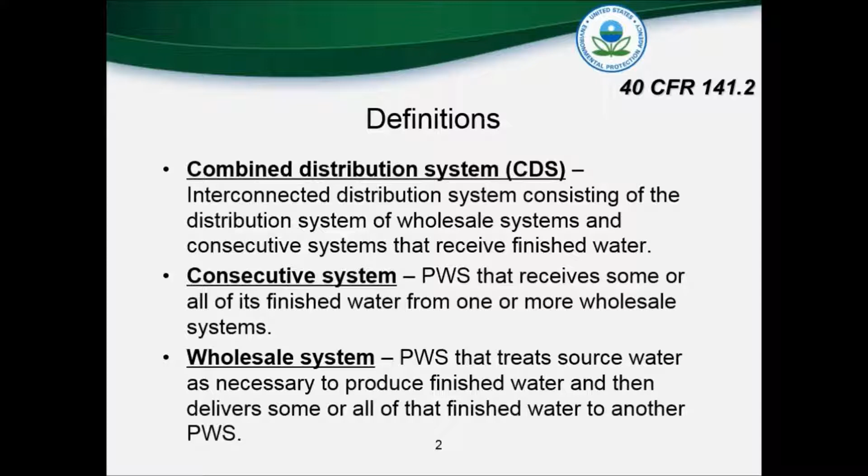Start off with some quick definitions so that everybody either remembers or we're on the same page. Some important ones for this presentation, Stage 2 in particular: the combined distribution system, which are interconnected distribution systems consisting of a wholesale system and consecutive systems that receive the finished water from their wholesale system. A consecutive system is a public water system receiving some or all of its finished water from one or more wholesale systems. A wholesale system, to complete the combined distribution system, is a public water system that treats source water as necessary to produce finished water. Finished water is important in this definition and the previous ones — producing finished water, then delivering some or all of that finished water to another public water system.

Another important part of Stage 2 is the dual sample set, which is two samples collected at the same time and location, with one of those samples analyzed for total trihalomethanes and the other analyzed for haloacetic acids, the 5-HAAs.

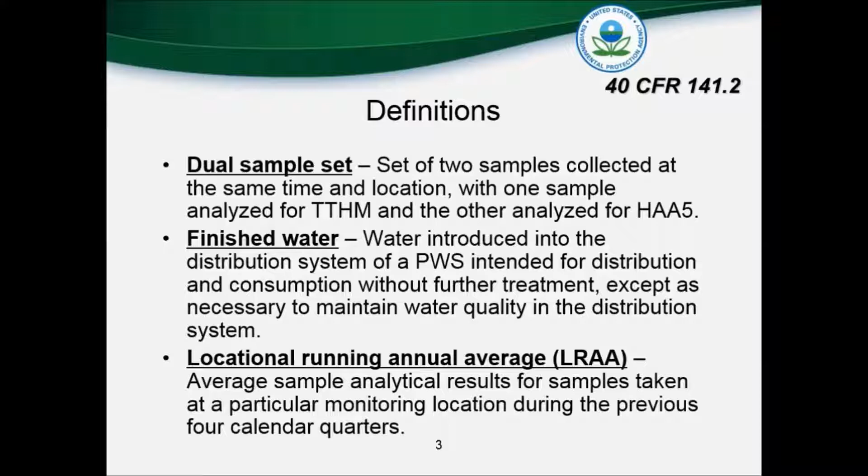Finished water, again an important part of implementing this regulation and others, is defined as water introduced into the distribution system of a public water system intended for distribution and consumption without further treatment, except as necessary to maintain water quality in the distribution system. And on the compliance side, another important part is the locational running annual average, or LRAA, which is the average of the analytical results for samples taken at a particular monitoring location during the previous 4 calendar quarters.

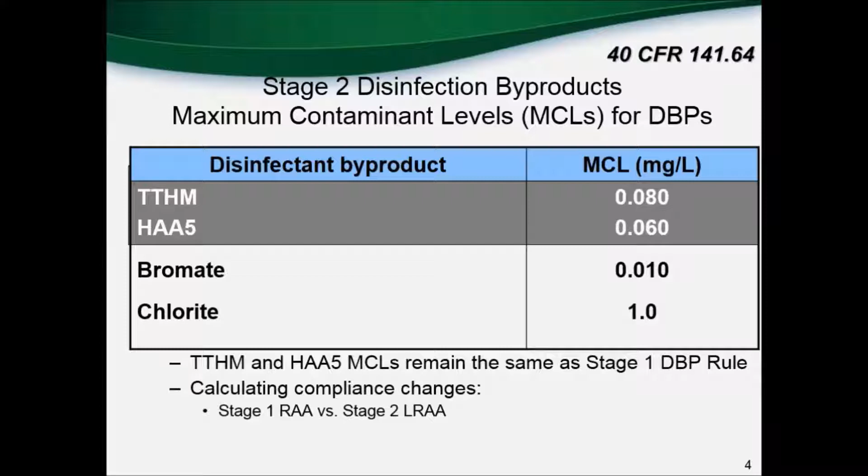Okay, a quick review of the maximum contaminant levels for the Stage 2 disinfection byproducts. They are the same as everyone's been used to dealing with under the Stage 1 rule. However, the compliance calculation has changed, as we just talked about, from a running annual average system-wide to a locational running annual average. The TTHM MCL stays the same at 80, and HAA5 at 60. The bromate and chlorite MCLs are also the same.

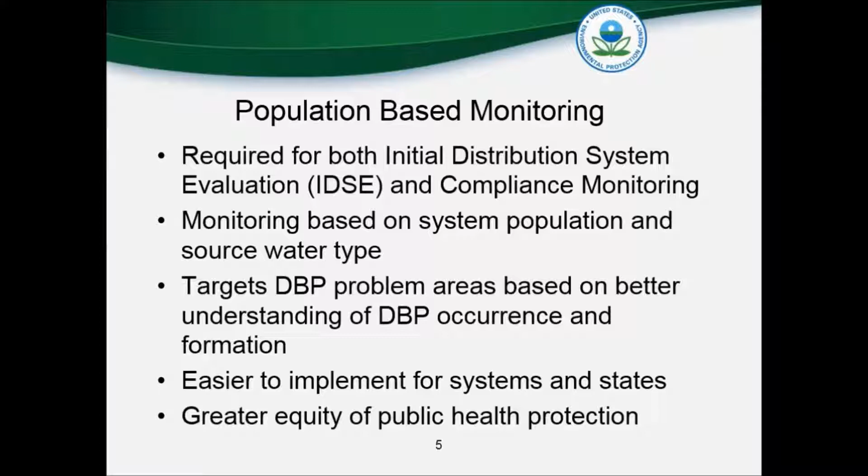An important difference between the Stage 2 rule and Stage 1 is population-based monitoring. This was an important part of developing what you see in the sampling schedules. It's required for both the initial distribution system evaluation, which we'll talk about, and ongoing compliance monitoring. Population-based monitoring is based on system population and source water type, with the goal of targeting DBP problem areas based on a better understanding of where they occur and how they form within a distribution system. It was developed to ease implementation for both systems and states and to provide greater equity of public health protection by identifying where DBPs occur, how they're formed, and the population exposed.

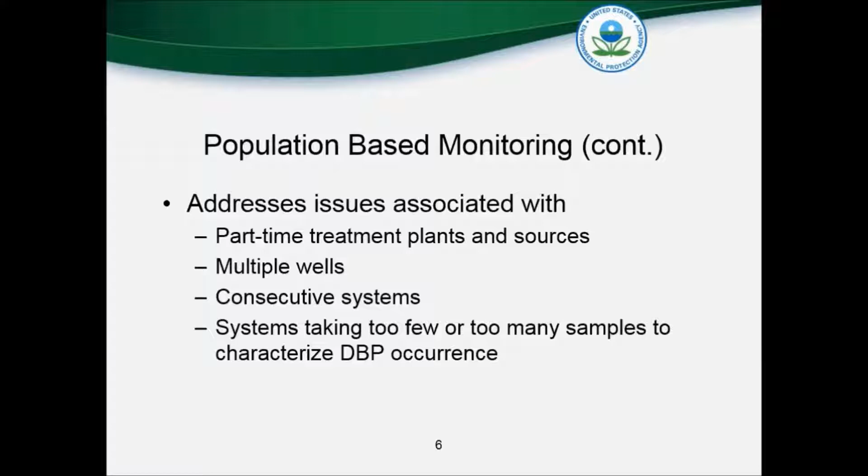This monitoring concept addresses issues associated with part-time treatment plants and sources, systems with multiple wells, the consecutive system issue which we'll talk more about, and under the previous regulatory structure, some systems were taking too few samples, or too many samples, to accurately characterize DBP occurrence.

Quickly review the IDSE requirement. Although that part of the rule has since passed, there is still some connection which we'll talk about in terms of newer systems and changes in systems. The purpose was to determine the locations of high TTHM and HAA5 concentrations in the distribution system, and those results were used in conjunction with Stage 2 disinfection byproduct compliance monitoring to identify and select the Stage 2 compliance monitoring locations.

Another important concept for this rule and for others is what is a combined distribution system. The intent of a combined distribution system is to treat a number of connected systems as one system for monitoring purposes.

The state may determine that a combined distribution does or does not include certain consecutive or wholesale systems based on a number of factors, including whether the connections are emergency connections, meaning the system receives water from a wholesaler or delivers water to a consecutive system only on an emergency basis. Another exception would be a small percentage and volume of the total water supply received from or delivered to another system.

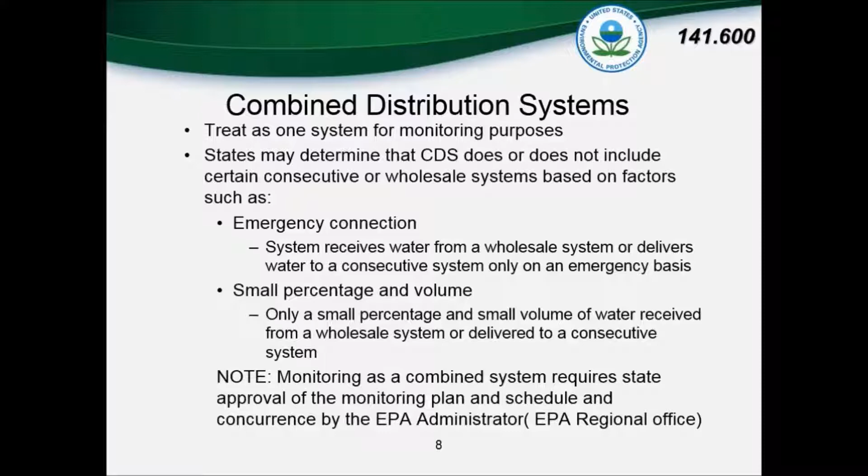As I mentioned, the IDSE, or Initial Distribution System Evaluation component of the rule has passed, or expired. Those requirements finished a while ago, and all systems would have done their IDSE or the equivalent. So the question comes up: what about new public water systems? What about systems consolidating into a combined distribution system, or adding new consecutive or wholesale connections, or new service areas, either after their initial IDSE, or new systems which had not completed an IDSE?

For new systems, all systems are required to have a monitoring plan. That monitoring plan includes the dates and locations needed to meet the Stage 2 requirements, and the sample site selection for that plan should be consistent with an IDSE.

States can require modifications to sampling plans for new or existing systems. The state could require an IDSE-like evaluation or review for new systems as a process in selecting Stage 2 monitoring sites.

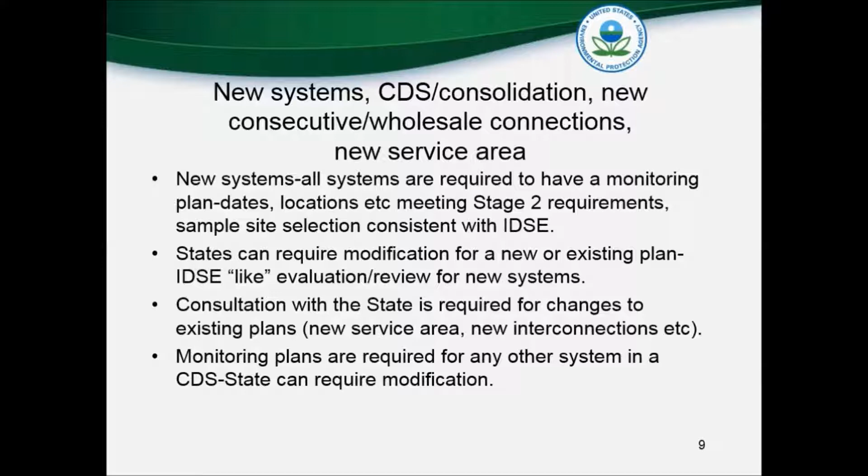There's also a requirement for consultation with the state for any changes to existing plans, including a new service area or new interconnections between wholesalers and consecutive systems. Monitoring plans, important for combined distribution systems, are required for each system in a combined distribution system, and the state can require modifications to those plans as needed.

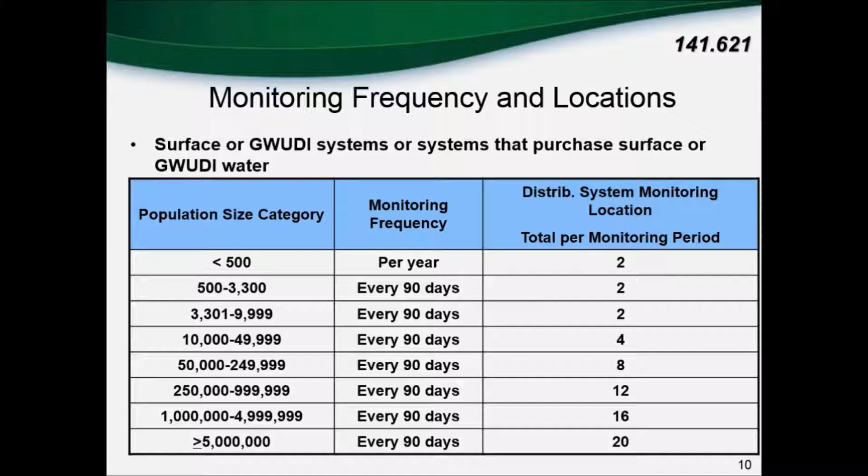Monitoring requirements for smaller systems range from 2 per year for the very small, up to 20 total during a monitoring period -- that's quarterly monitoring for the large systems greater than 5 million. Important: that's for surface water systems or groundwater under the influence, or consecutive systems that purchase that surface water or groundwater under the direct influence supply.

Monitoring frequencies for groundwater systems, or systems that purchase that groundwater, are somewhat reduced. Again, not much for small systems serving less than 500 -- 2 locations per monitoring period, that would be a year -- up to 8 locations per monitoring period for the very large systems, every 90 days.

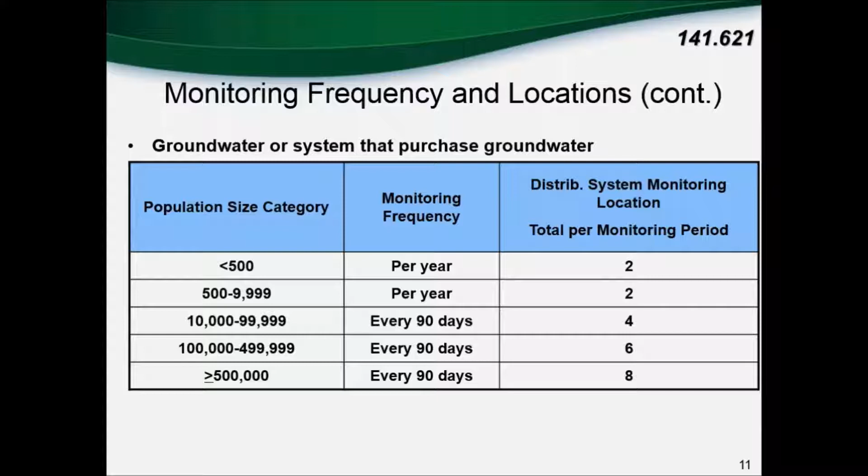Compliance calculations are based on quarterly monitoring. If the system is monitoring quarterly, they make compliance calculations at the 4th quarter following the applicable compliance date -- this would be systems that started after the initial implementation rules, so that part would have been finished. Subsequent monitoring and compliance involves making compliance calculations at the end of each subsequent quarter, calculating an LRAA as the basis for compliance.

For systems monitoring less often than quarterly, the initial monitoring included the first compliance date taken after the compliance date. For continuing compliance: if a sample is less than or equal to the MCL, the system is in compliance. If a particular sample is greater than the MCL, the system must begin increased monitoring, going back to quarterly monitoring. However, it is not an immediate violation.

Systems that are allowed to perform annual monitoring under the Stage 2 rule must increase to quarterly monitoring for any TTHM sample greater than 80, or an HAA5 sample greater than 60, or in correct units, 0.080 milligrams per liter or 0.060 milligrams per liter.

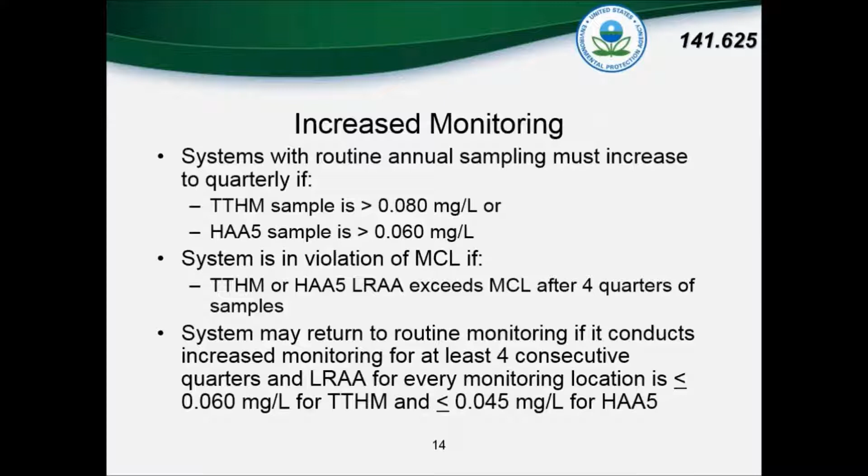The allowance for reduced monitoring is a locational running annual average less than or equal to 0.040 milligrams per liter for TTHMs and less than or equal to 0.030 milligrams per liter for HAA5s at all monitoring locations. So for each monitoring location within a system, the LRAA for each of those locations is needed for reduced monitoring.

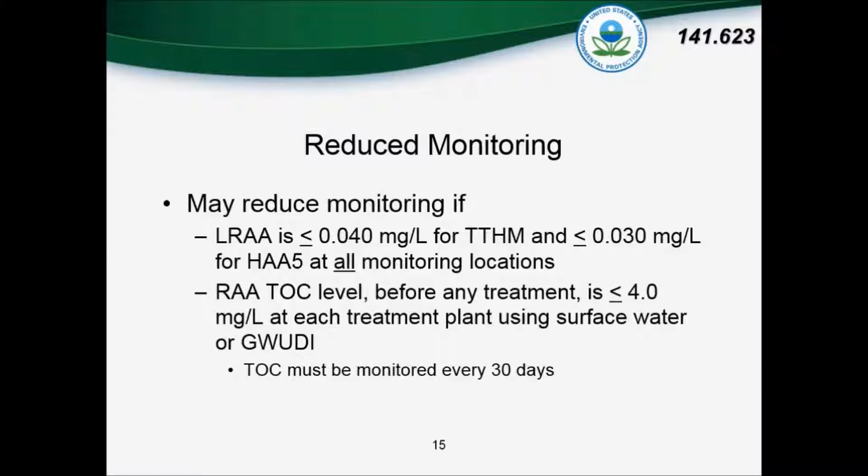There's also a requirement that the running annual average TOC level before any treatment is less than 4 milligrams per liter at each treatment plant. This is specific to plants and systems using surface water or groundwater under the direct influence who are currently monitoring TOC at least every 30 days.

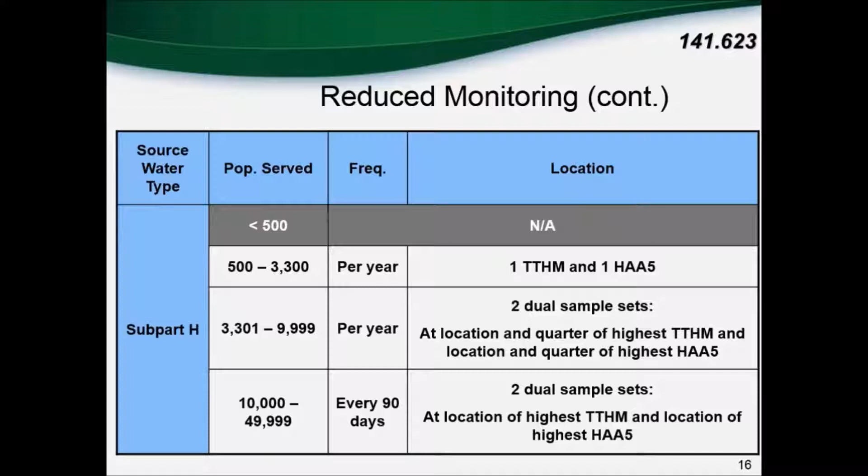Again, I won't go through the chart here. The minimum number of samples for the smaller systems using surface water remains: less than 500 do not reduce. For those systems between 500 and 3,300, one sample and one HAA per year, ranging to the very largest systems. Larger systems greater than 10,000 sample every 90 days, with the number of samples, sites, and sets increasing as the system size increases.

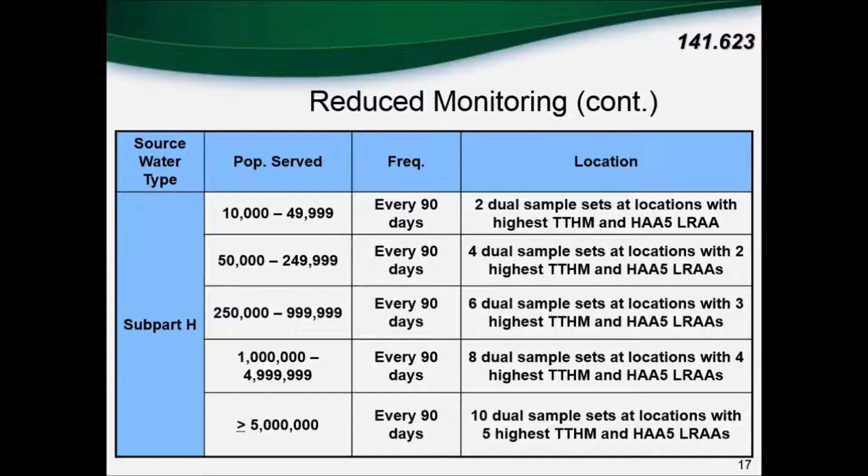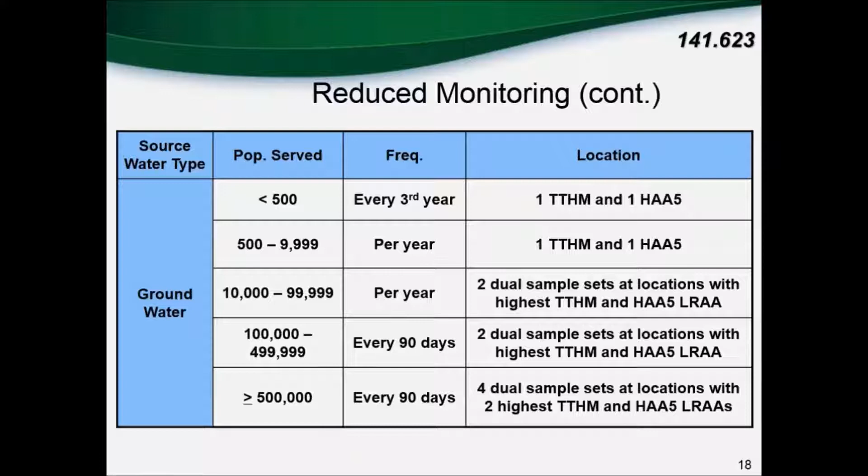Groundwater systems less than 500 sample every third year. Important note here is that this is a change from the Stage 1 requirements, where systems larger than 500 could reduce to every 3 years. In this revision, only those systems serving less than 500 and serving groundwater may reduce to every third year, again ranging from one sample, one dual sample set—which we talked about, that's a TTHM and an HAA5 at the same location—for the very smallest, ranging all the way up for the larger systems.

Consecutive systems are an important part, with some changes in this rule and some specifics for consecutive systems. The Stage 2 requirements apply to consecutive systems that deliver water that has been treated with a primary or residual disinfectant. The important word is deliver water that has been treated.

Monitoring, reporting, and MCL and operational evaluations remain the same for consecutive systems. And consecutive systems that do not add a disinfectant but deliver water treated with a primary or secondary disinfectant must continue to meet the Stage 1 maximum residual disinfectant levels, which we'll talk about for chlorine and chloramine.

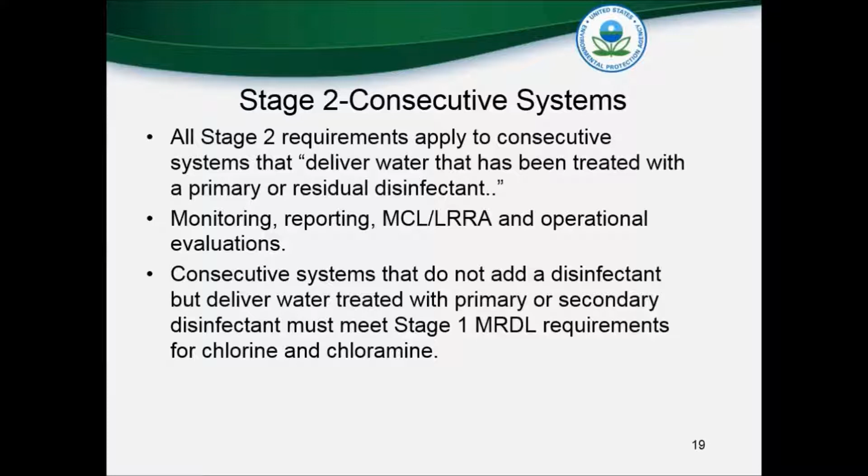Again, we talked about combined distribution system compliance. It is allowed, but each system within a combined distribution system must monitor. Another important point is consecutive systems are public water systems under the Safe Drinking Water Act, and the consecutive system is fully responsible for compliance.

Consecutive systems, even though they're receiving treated water, can take steps to reduce disinfection byproduct levels and formation in their distribution systems. Those steps could include water age management, storage management, changes of valving in zones, changes in residual or booster disinfection, distribution system operation optimization—which we'll talk about—and switching to chloramine for residuals if needed.

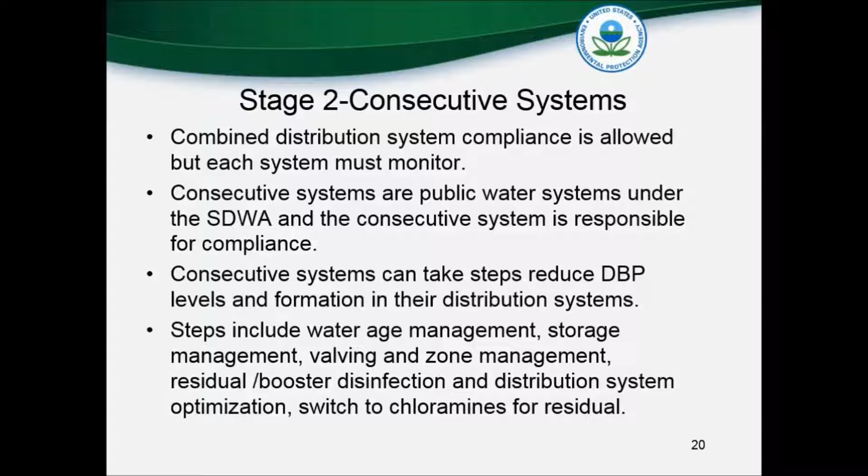Operational evaluation levels are also an important part of Stage 2. Why do we have an operational evaluation level? There are concerns about higher levels of disinfection byproducts in the distribution system that are not identified because of the results of averaging samples. An operational evaluation is a chance for a system to evaluate its operational practices from source all the way to treatment, to identify opportunities to reduce disinfection byproduct concentrations in the distribution system.

It serves as a pre-violation warning that the system may violate the LRAA depending on what actions they take and what happens in their system. It also serves as an information resource for states to use in sanitary surveys, in their evaluations of treatment, and any technical assistance they're providing to the system.

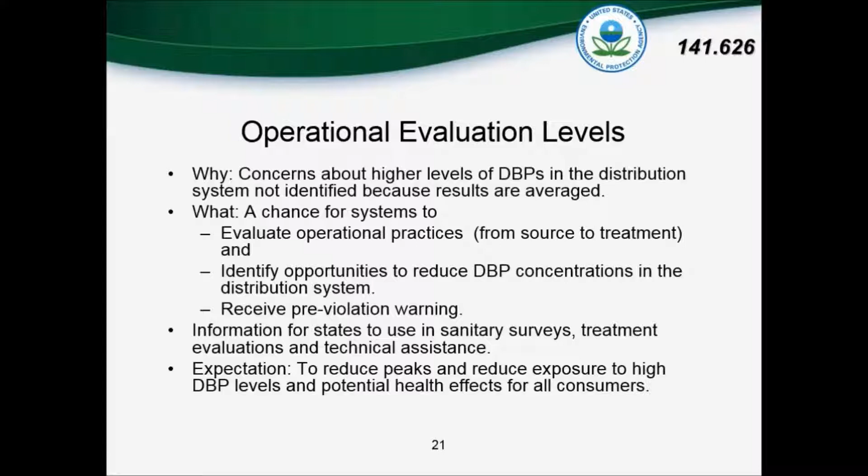The expectation of the OELs, or operational evaluation levels, is to reduce peaks, reduce exposure to high DBP levels, and the potential health effects for all consumers. Quickly, the calculation: current quarter's results times 2, plus the sum of the 2 previous quarters, divided by 4. Operational evaluation levels are exceeded during any quarter in which the operational evaluation level is greater than the TTHM or HAA5 MCL.

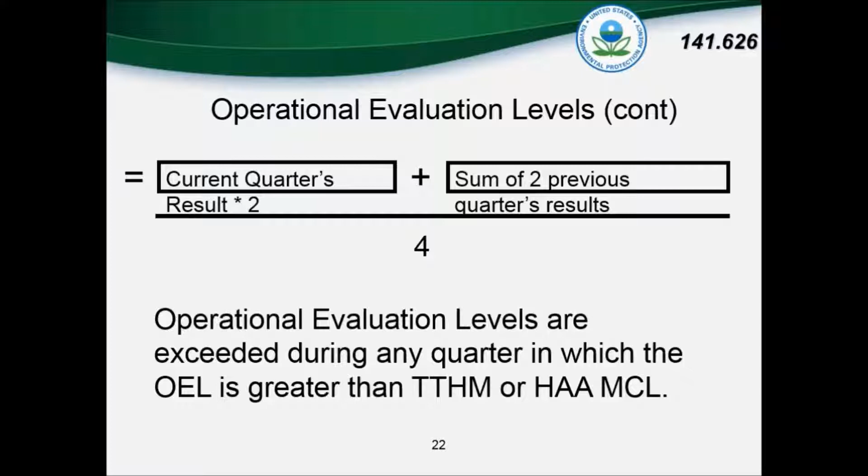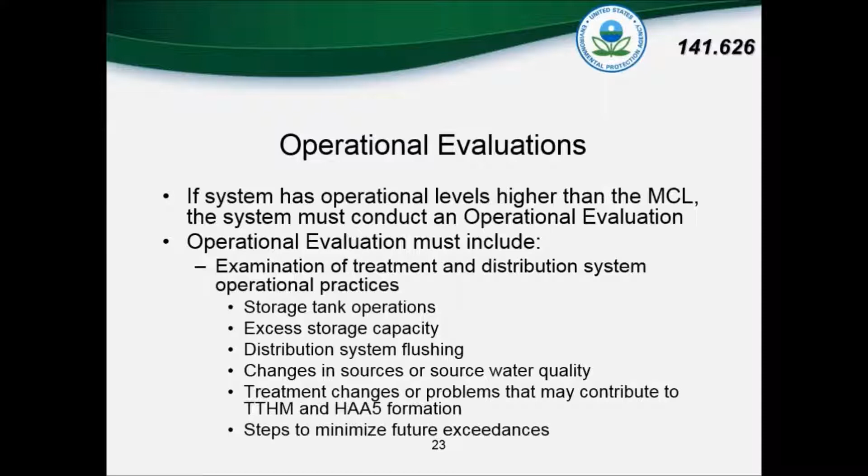If the system has operational levels higher than the MCL, the system must conduct an operational evaluation. That evaluation must include storage tanks, excess storage capacity, flushing in the distribution system, any changes in sources or source water quality, any treatment changes or problems with treatment that may have contributed to TTHM and HAA5 formation. A very important component is what steps the system could take to minimize future exceedances.

States are allowed to limit the evaluation if the cause has been identified. However, the steps to minimize the exceedances still need to be addressed.

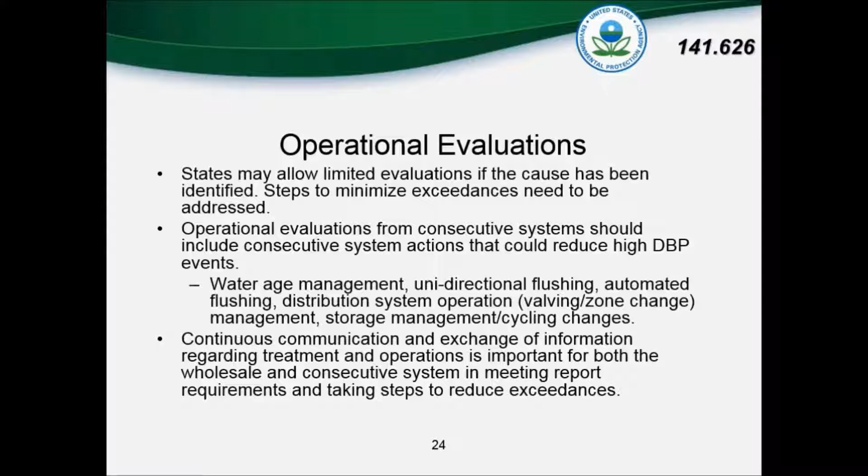Operational evaluations from consecutive systems should include consecutive system actions that could reduce DBP events, including water age management, flushing, changes in valving or zoning, and management of storage and cycling changes in pumps. Continuous communication and exchange of information regarding the treatment that's occurring and operations is important for both the wholesaler and the consecutive system to meet their reporting requirements and to take steps to reduce exceedances.

The best available technologies for disinfection byproducts are identified for systems that disinfect: enhanced coagulation or softening resulting in TOC reduction combined with GAC10, nanofiltration with molecular weight cutoffs less than or equal to 1,000 Daltons, and GAC20 as a separate component.

For consecutive systems that buy or receive disinfected water, the best available technologies for those serving more than 10,000 people are improved distribution system management and storage tank management, decreasing residence time, plus the use of chloramines as a residual disinfectant. For systems serving less than 10,000, the best available technology includes improving distribution system and storage tank management to reduce residence time.

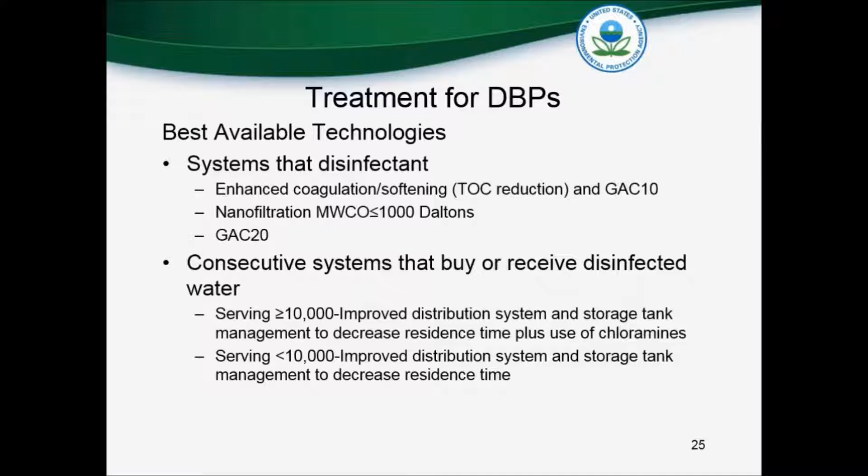What about proactive measures to reduce DBPs before a compliance issue comes up? The question would be, where do they form, in the plant or the distribution system? Answering that would include monitoring the plant finished water, monitoring in the storage facilities, monitoring consecutive system entry points, increased non-regulatory monitoring in warmer months, and repeating that monitoring seasonally to track how seasons and temperatures affect formation.

Is it possible to switch or blend sources to reduce TOC, NOM, formation potential? Can any operational changes in using or blending sources help reduce DBP formation? Which species or component dominates - is it TTHMs or HAA5s - which would also indicate where management in the distribution system should focus? And then setting plant effluent disinfection byproduct goals, non-regulatory, along with distribution system targets, so operators can focus on adjustments to reduce disinfection byproducts.

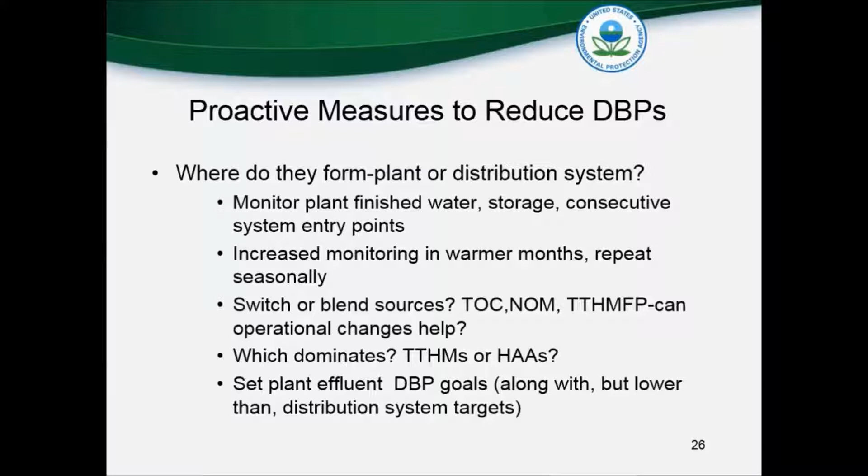Another proactive component would be treatment optimization, including coagulation and settling process changes to reduce TOC and NOM, consideration of coagulant dose and type, the pH during coagulation, and any operational practices in coagulation that could reduce precursors. Biological filtration is capable of reducing NOM precursors, and pre-chlorination or pre-disinfection has to be stopped, but no pre-oxidants are needed.

Changes in disinfection practices: if raw water or settled water is being disinfected, can it be eliminated or reduced? Can injection points be removed? However, during treatment optimization and changes, simultaneous compliance and the secondary impacts of those changes have to be considered. That includes meeting disinfection or CT requirements, any inorganics removal the plant may be trying to achieve, and lead and copper rule and corrosion control considerations in the distribution system.

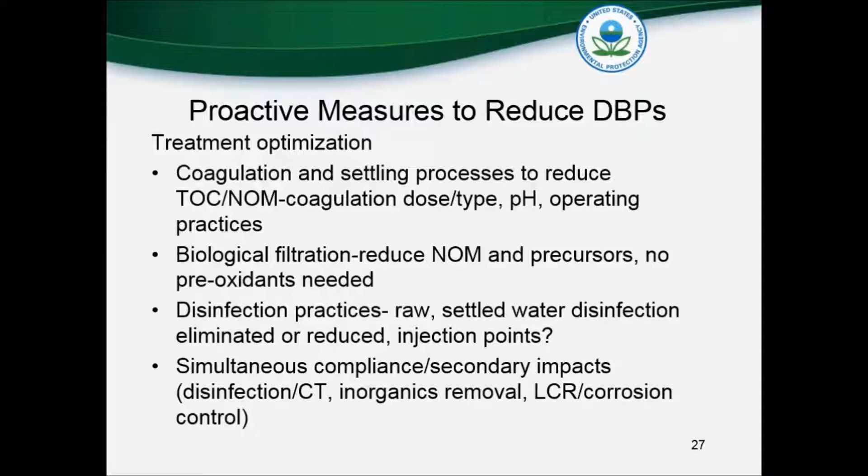Distribution system optimization can also play a role in reducing disinfection byproducts. Optimization activities would include monitoring the chlorine residual in areas of suspected high water age, setting distribution system disinfection byproduct goals lower than the MCL, in combination with lower treated water disinfection byproduct goals, and finding management or operational strategies to meet those goals.

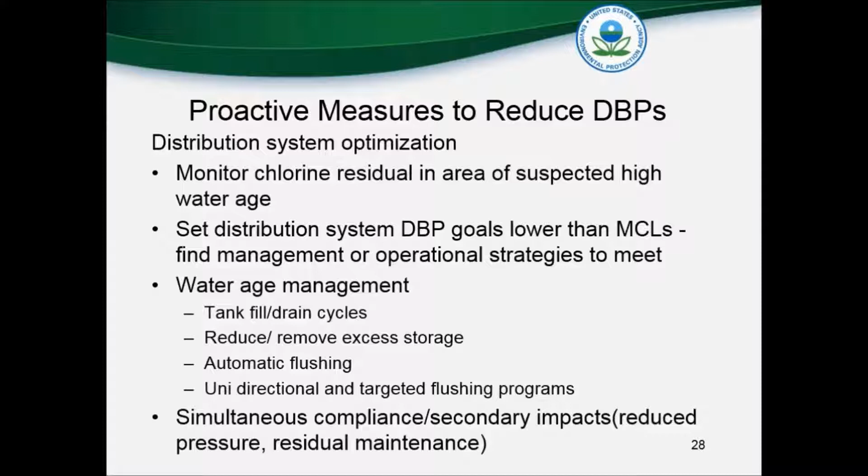Water age management would include tank fill and drain cycles, removing or reducing excess storage, automatic flushing, and focused flushing programs such as unidirectional and targeted flushing programs. Again, simultaneous compliance and secondary impacts must be considered, possibly reduced pressure and more difficulty maintaining residuals in the system.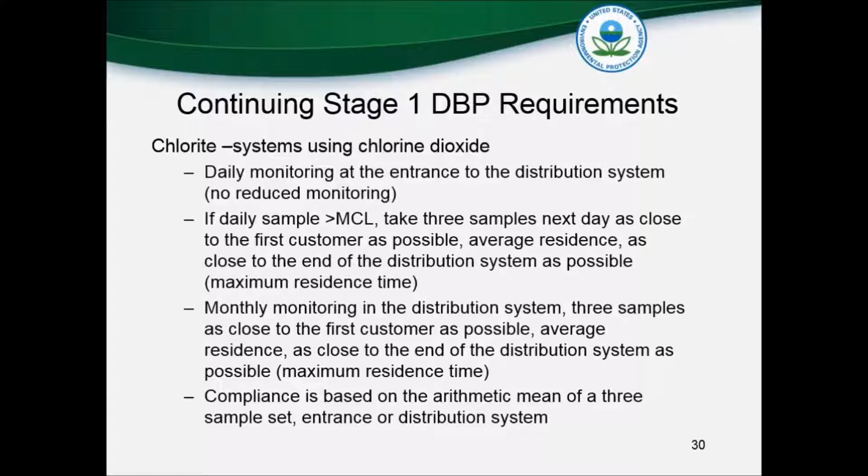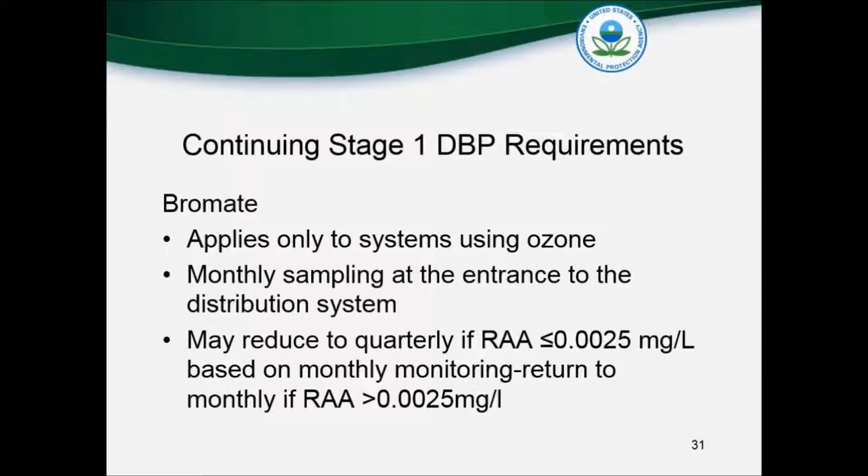Systems using chlorine dioxide continue to be required to monitor for chlorite, with compliance based on the arithmetic mean of sample sets at the entrance of the distribution system. Bromate continues to be required for those systems using ozone, monitoring monthly at the entrance to the distribution system. Chlorine dioxide monitoring requirements remain, measuring again at the entrance to the distribution system, with monitoring based on the results to the maximum residual disinfectant level. There is an acute violation component of chlorine dioxide, which hopefully no one has to deal with.

Disinfectant residuals for chlorine and chloramine - the MRDLs remain, measuring residuals at the same time and place as the TCR and revised TCR. The residual monitoring carries over to the RTCR.

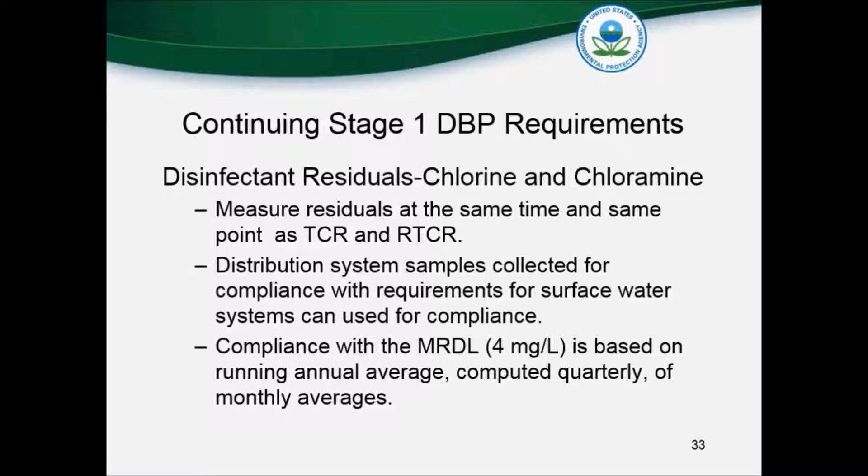Distribution system samples collected for compliance with requirements for surface water systems - those collected at the same time as the TCR samples can be used for compliance, and compliance is based on the running annual average of monthly samples.

Continuing requirements are DBP precursor monitoring for conventional systems. TOC requirements are used to determine enhanced coagulation. TOC removal is an indicator of precursor reduction prior to disinfection, reducing the potential for formation of DBPs. It remains as a parallel requirement to TTHM and HAA MCLs in the distribution system.

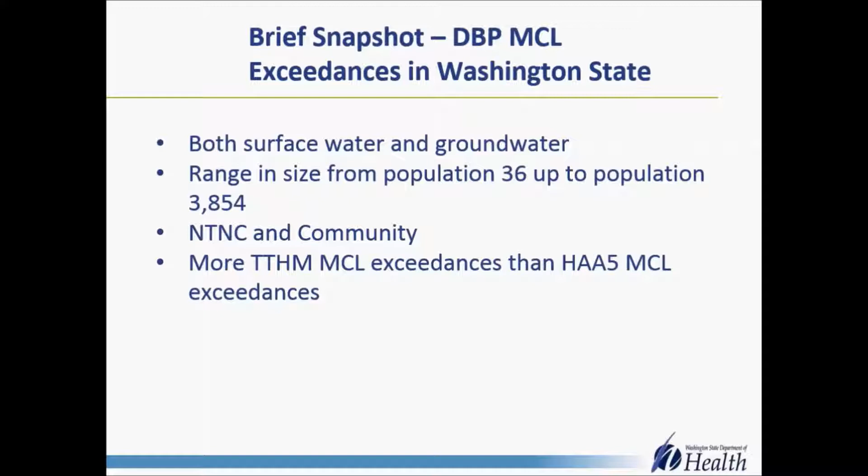So just to start with a brief snapshot, we have both surface water and groundwater systems here that have had DBP MCL exceedances, but the majority of those are actually groundwater. As you can see, these systems are small to very small, and the NTNC systems include an elementary school, a church, a power generation facility with 380 employees, and a national park lodge. We do tend to have more THM exceedances than HAAs.

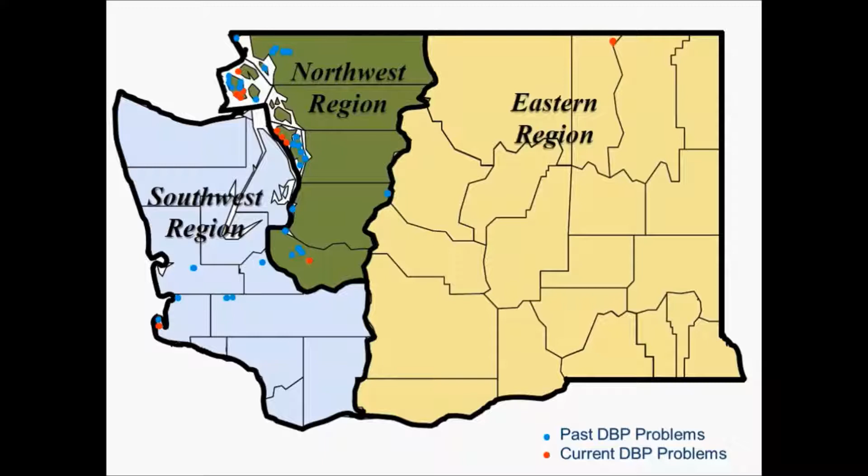So here's a map of Washington State, and you can see the little blue dots are where we've had some past DBP problems - they have either installed treatment or modified treatment to come back under the MCL, or made some operational changes. The red dots are the places where we still have some issues. You'll note there are some regional clusters, and the Northwest region, which is where I'm located, has the majority of the systems. As you'll see later, there's more than just geographic locations that many of these systems have in common.

Probably the biggest commonality with surface water systems is that their source water is not always the best quality, and most of them use small impoundments or streams. They are generally high in TOCs, but not in all cases, as you'll hear later.

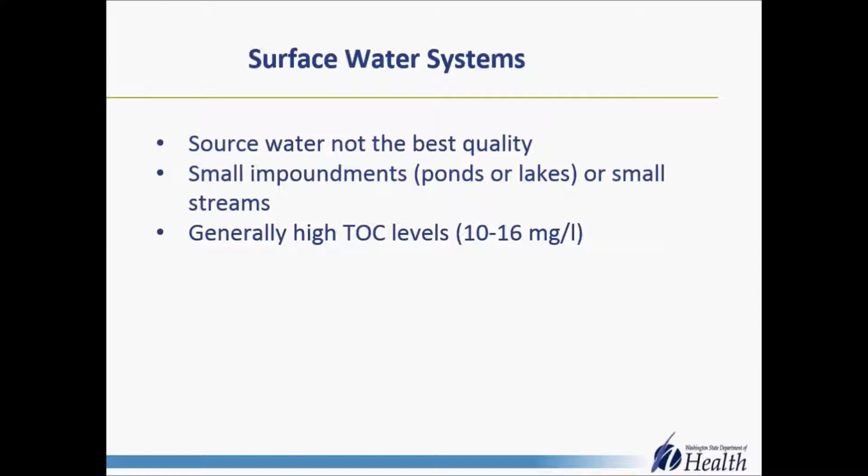As I was going through collecting information for this presentation, I discovered that many of the groundwater wells that have DBP problems have very similar water qualities. We hope this can help explain why these systems are having DBP problems, but maybe also help to come up with treatment solutions and experiences that can be shared. These systems generally have low to moderate TOCs, but not in all cases, as you'll see later. I'll go through in more detail some of the water quality characteristics these systems share.

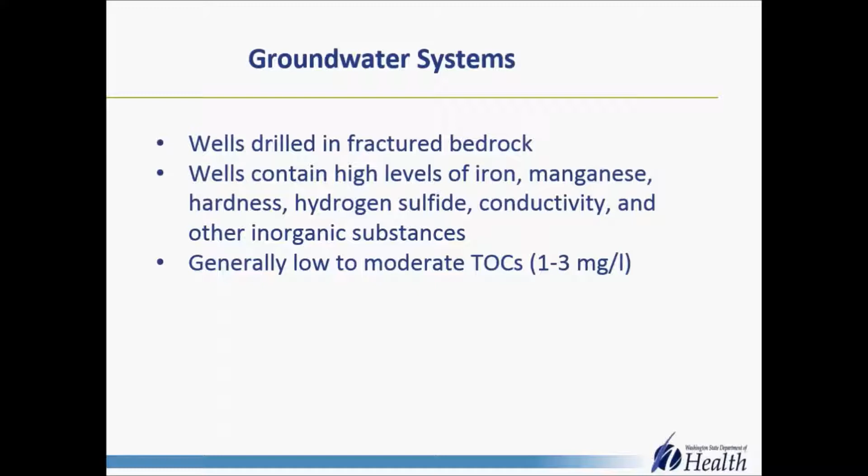Some examples of treatment installed here are aeration, which is post-treatment, both passive and active. Active being something more like a slat tray aerator or packed tower aeration, and passive being just spray nozzles installed into storage tanks. We also have a couple systems that have GAC installed both for precursor removal and for DBP removal after filtration. We'll also look at a couple systems that modified their treatment either through filtration or by changing coagulant or oxidant.

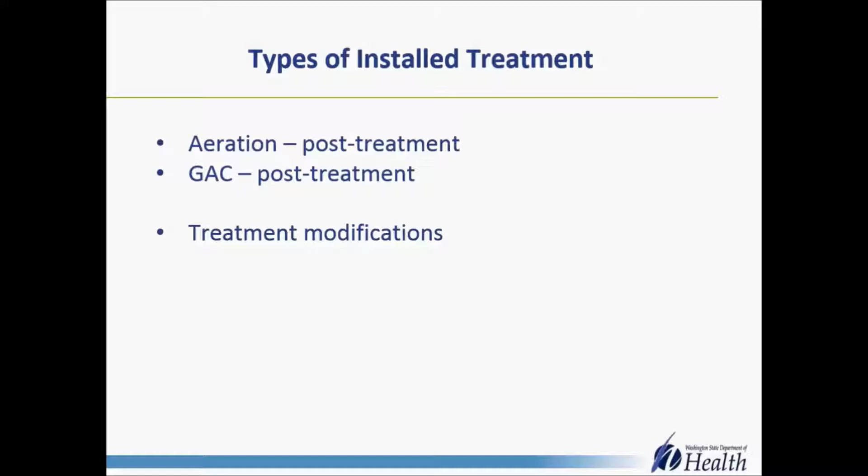To start off, the first system is a surface water system. It serves a small private community, and THMs are the main problem. They had a rapid rate package plant, and they installed active aeration through a packed tower aerator. They also have an RO unit used in the summertime to supplement the surface water source. There are 70 connections with a full-time population of about 90, but it serves a lot of vacation homes and snowbirds.

It's an association with a volunteer board and a contract operator, and TOCs can be pretty high during certain parts of the year. They installed a packed tower for aeration with constant recirculation at 25 gallons a minute.

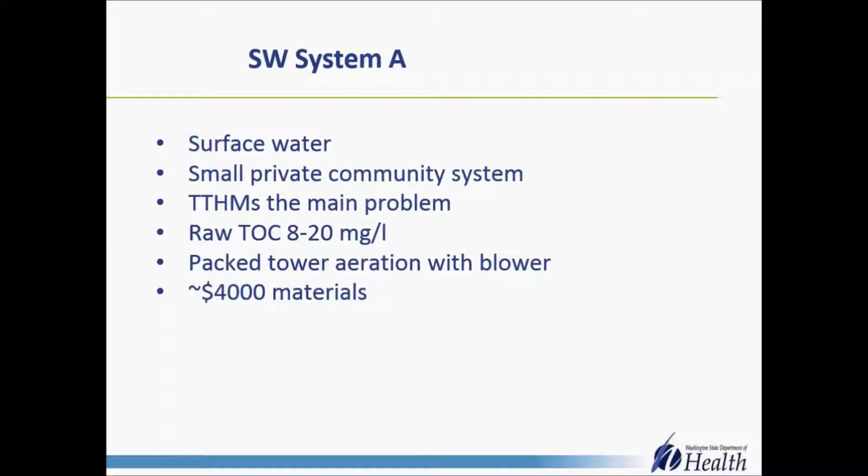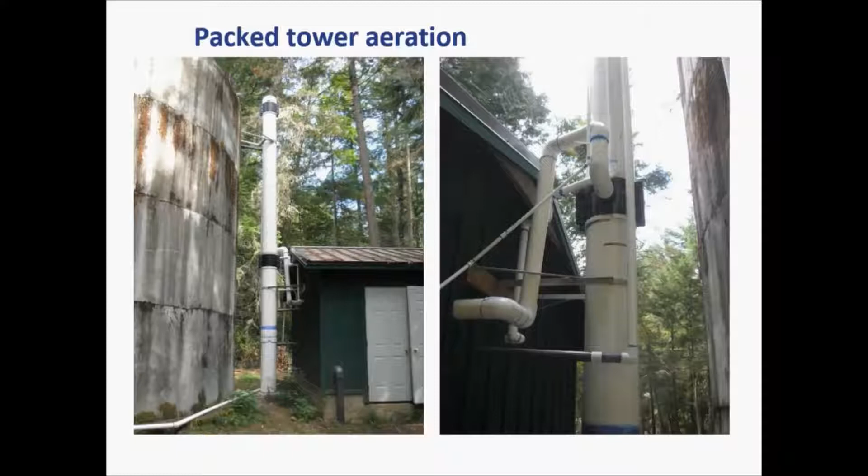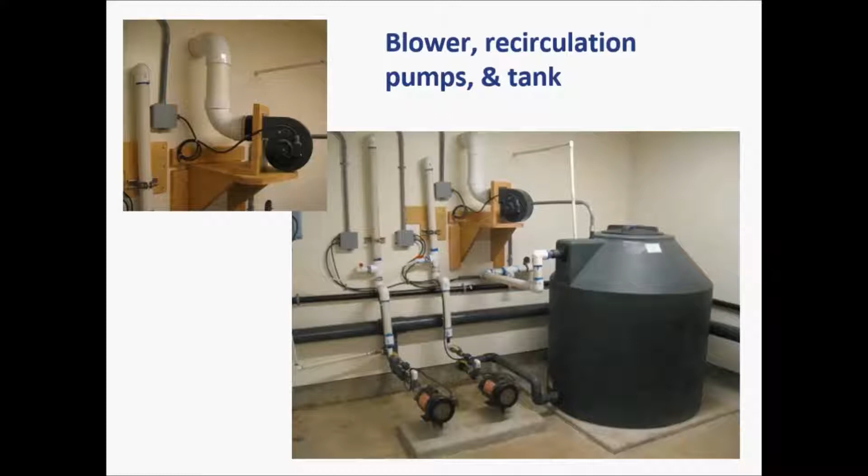Here's a picture of their system, the blower, recirculation pump, and tanks. They have constant recirculation at about 25 gallons a minute, with a recirculation tank and a 75 CFM blower. The pump on the right returns water from the drainage tank to the storage tank, and the pumps on the left pump water from the clear well to the packed tower.

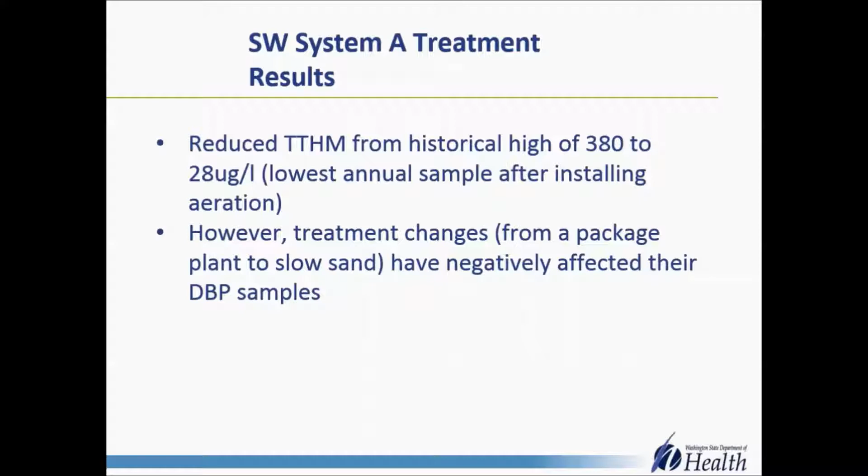Their highest samples were prior to the Stage 1 DBP rule under the old THM rule, and their highest ever was 380 micrograms per liter. They were back on routine annual sampling at one point after installing the packed tower, but since then they changed their rapid rate plant to a slow sand plant, and now both their THMs and HAAs have skyrocketed again above the MCL. So they're going to have more work to do here in the coming future.

The next system is also a surface water system, serving a resort community. The surface water plant includes potassium permanganate, a coagulant, muriatic acid for pH control, filter aid polymer, adsorption clarifier, mixed media filters, GAC, post-chlorination, and caustic soda for corrosion control. As a resort community, it serves a hotel, cabins, and rental homes. The full-time residential population is about 329, but the part-time population more than doubles during the summertime.

While not used for the DBP monitoring population, they also get about 1,300 transit visitors per day during the summer peak. Prior to installing the GAC, they were already getting about 56% removal of TOC through the existing plant, but still had ongoing problems with THMs and, every now and then, HAAs as well. So they installed the GAC in 2009, two units in series post-filtration.

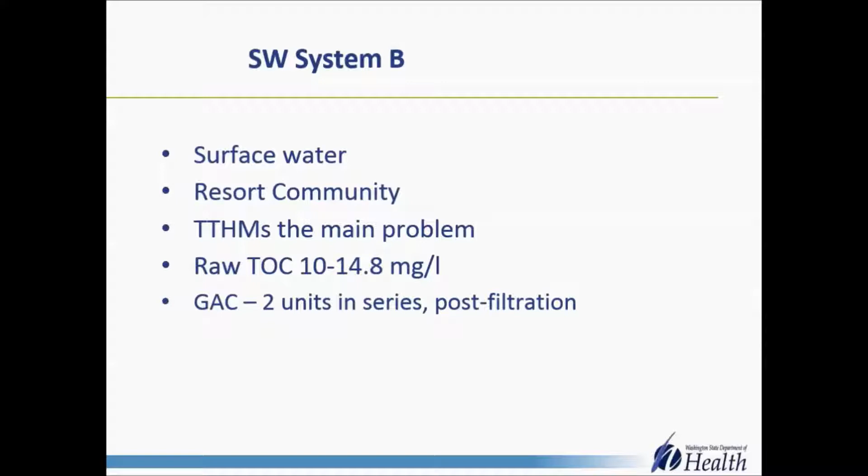A new dam was just installed a few years ago that provides a higher elevation overflow, and the system is currently working on a strategy to manage the transition of the lake due to this operational change. It's looking like the higher overflow may actually cause the GAC to be used up sooner.

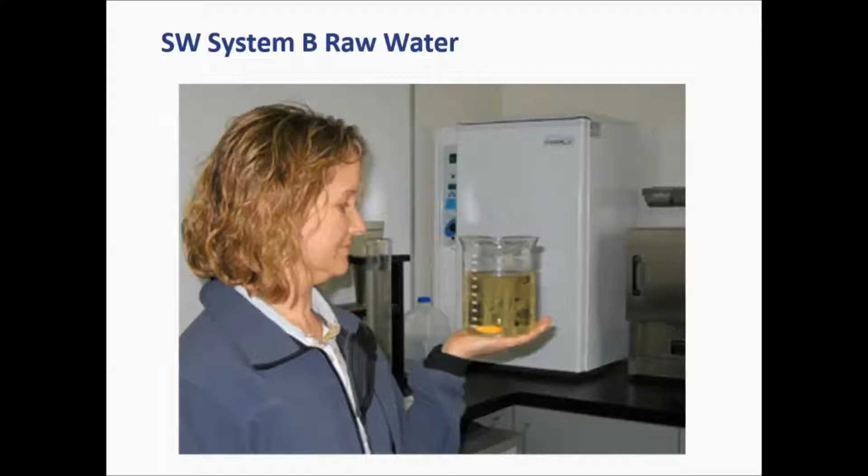They have 2 tanks, each 5,200 gallons, holding 20,000 pounds of carbon. The design flow is 200 gallons per minute with an empty bed contact time of 22.6 minutes.

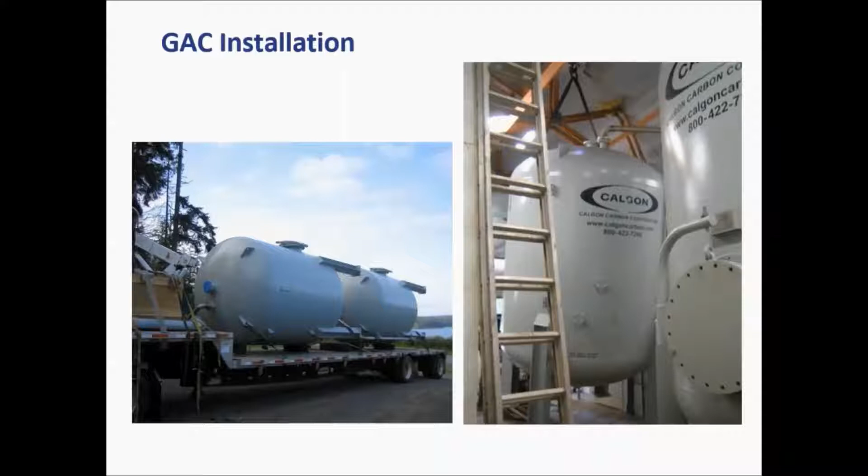The system is located on an island only accessible by ferry, private boat, or plane, so getting equipment and trucks over for service and maintenance of the GAC is a little more work than normal.

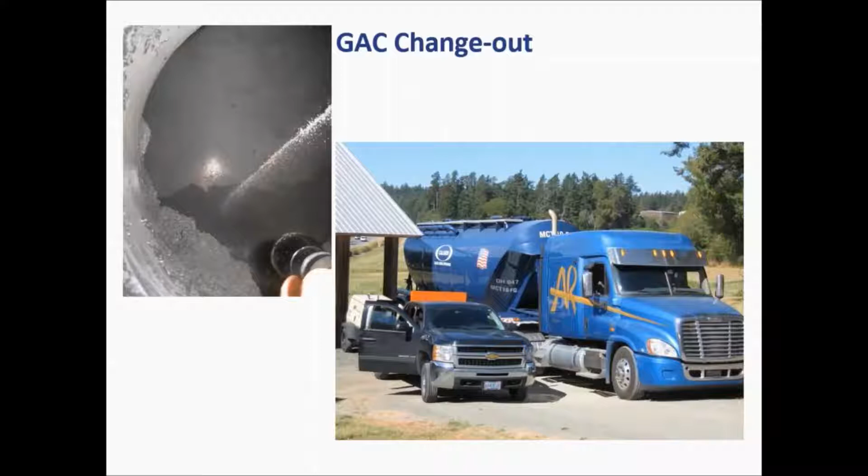Here you see a GAC changeout. Part of the discussion with this system during the design phase is how often they should change it out - do they wait until the LRAA is approaching or over the MCL, or do it sooner?

The approved design for this system specified that it should be changed out after the first high quarterly sample above the MCL. At about $36,000 for each change out, the design expectancy of the life of the GAC was about 470 days.

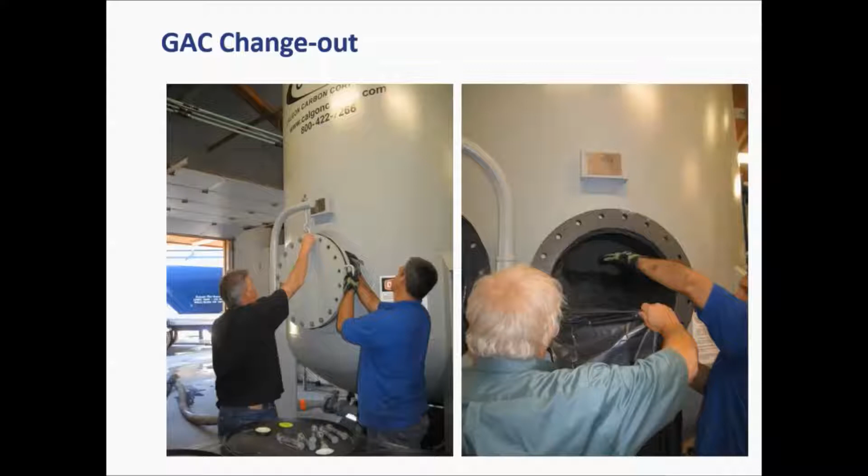They had been getting about 2 years life, actually much greater than the design expectancy. But with the changes at the dam, this may not be quite as long in the future.

Part of the pilot study for the GAC system also included looking at a correlation between UV254 and TOC, assuming that removal of TOC reduces DBPs proportionately.

They have a target TOC of 2 milligrams per liter, approximately 1/4 of the treatment plant filter effluent TOC level. They are using UV254 to help control their coagulant dose to meet that target.

They're taking weekly pre- and post-GAC samples to analyze for UV254, monthly THM and HAA samples for tracking. So they're actually going above and beyond what they need to do to stay on track.

They did reduce their levels of both THMs and HAAs, and treated water TOC was cut from about 10 to 15 on the raw water by about a half to a third. So the system is working well.

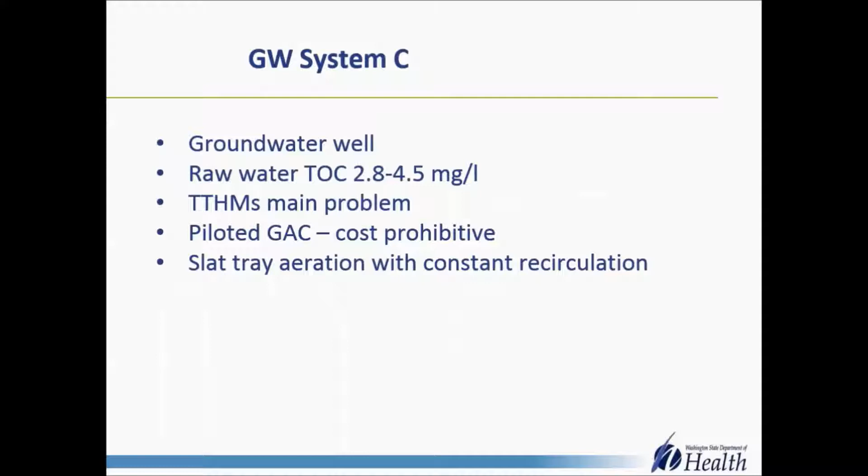The next system I'll talk about is a groundwater system. They have installed active aeration in the form of a slat tray aerator. Their TOCs are relatively low; THMs is the main problem. They did pilot GAC, but found that it was cost prohibitive to do that.

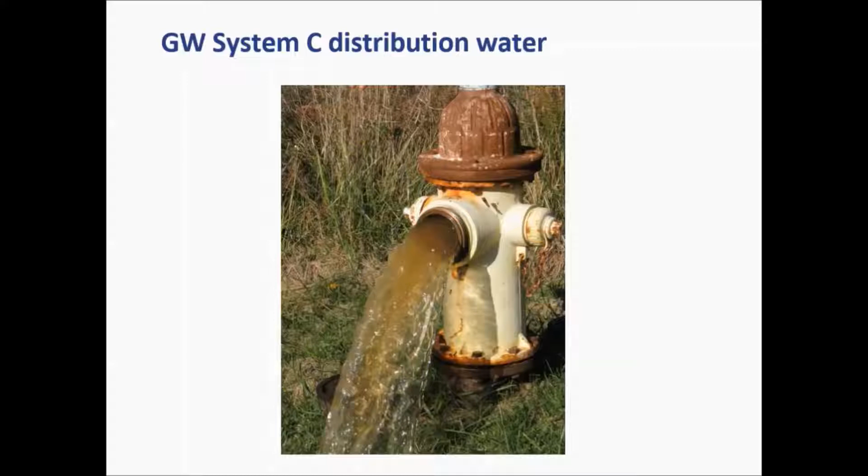This system has raw water manganese at about 3 times the secondary MCL, with treated water manganese right around the secondary MCL. They also have high chlorides at about 178 milligrams per liter, very hard water at 280 milligrams per liter, conductivity at about 1,191, and total dissolved solids at 640 milligrams per liter. So not really the best groundwater quality to begin with.

Here's a picture of the slat tray aerator they installed. The aeration was also installed for lead and copper treatment, with a target pH of raising it to about 8 to 8.2. It's a 6-tray aeration unit, constant recirculation at about 25 gallons a minute, 150 CFM blower, and the design target was to have 45% bromoform removal on a single pass.

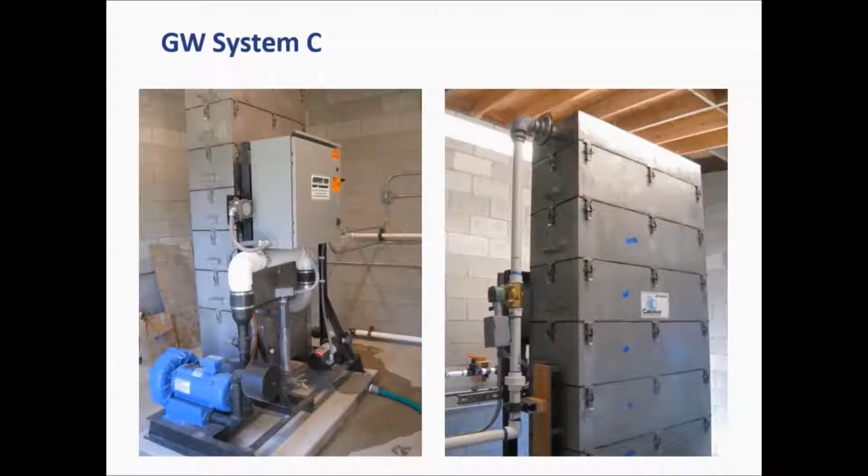As we've been finding, active aeration using a slat tray aerator or packed tower or some other designed aeration is much better than the simple passive spray aeration.

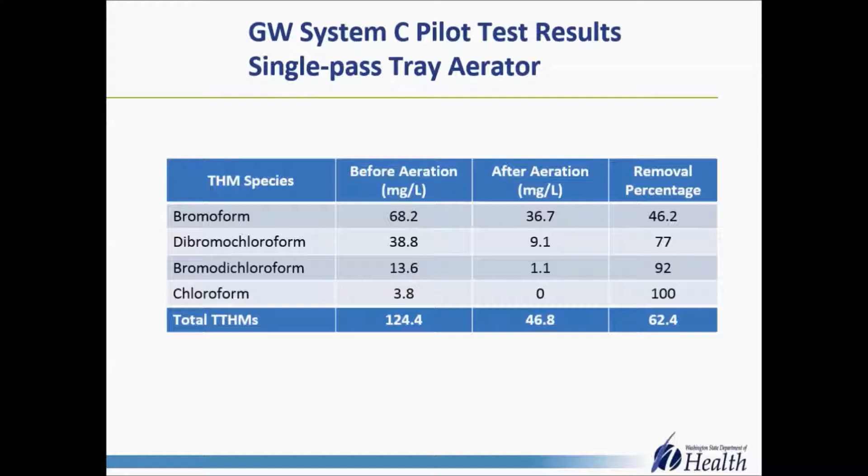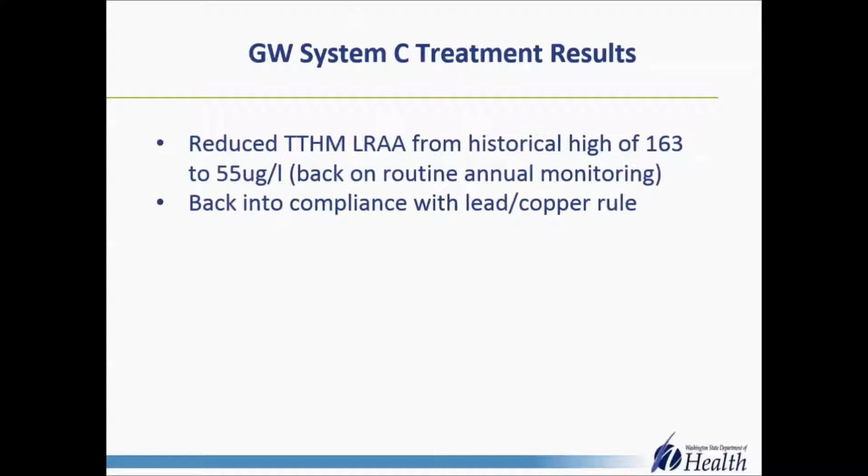This system did reduce their THMs, and they are back on routine annual monitoring, and they also are back in compliance with the lead copper rule.

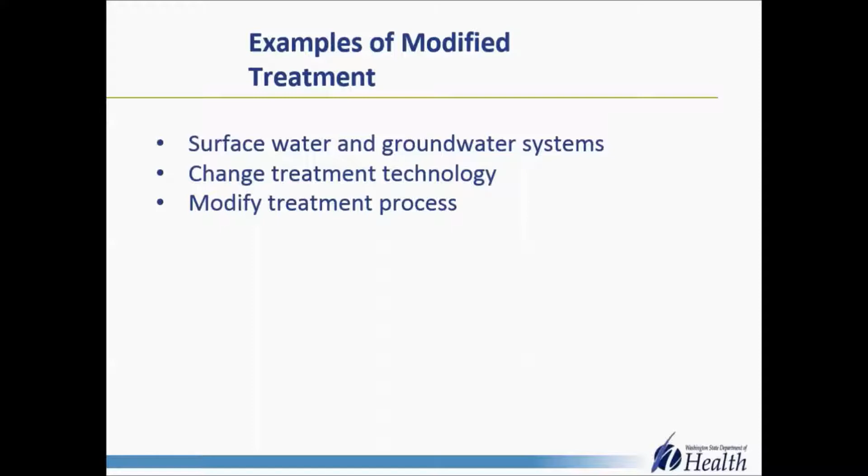Now I'll go through some examples of modified treatment. Again, these are both surface water and groundwater systems. We'll go through some treatment technology changes and also some modified treatment.

So they use aluminum chlorohydrate to address the TOC, and they take TOC samples and adjust the ACH dosage based on TOC levels. And then they also changed from a rapid rate plant to a membrane filtration plant.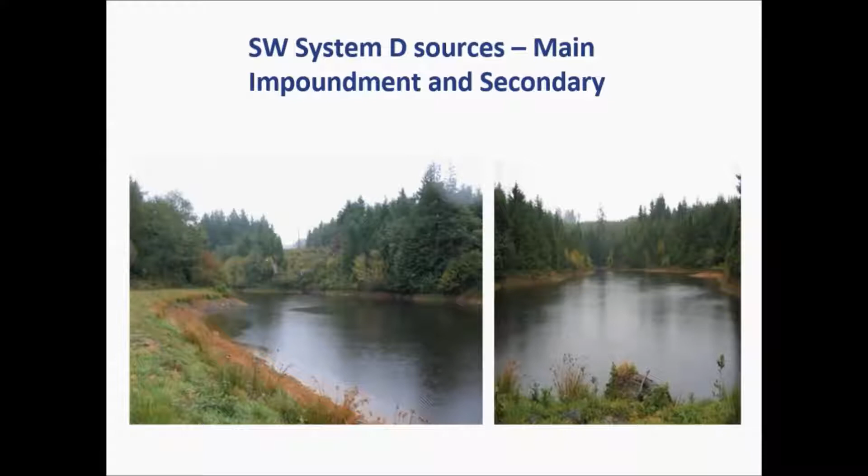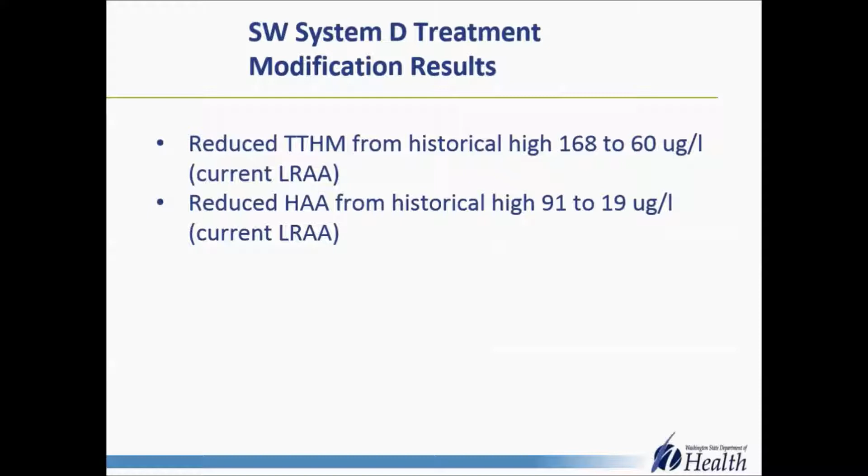They did have some luck with their treatment plant changes, but just in the past couple months, it seems like their DBPs are increasing again, so they may need to do more work on getting that under control.

The next system is also a surface water system, with a population just under 3,000. Again, for this one, the HAAs were the main problem, but they did have some individual THMs above the MCL, just not their LRAA. The water leaving the treatment plant was already close to the HAA MCL. They do have high algae, and their raw water TOC is relatively low at 1 to 2 milligrams per liter, but they do have some challenges that I'll describe next.

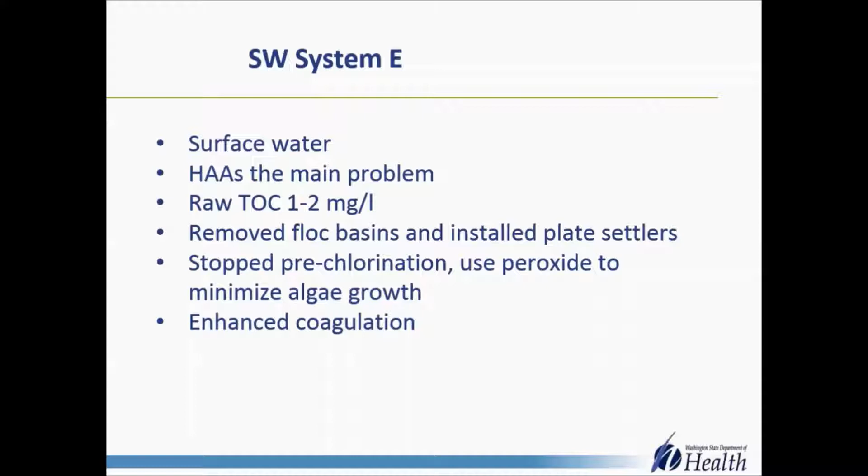The treatment changes they made: they modified their flocculation stage with plate settlers, stopped pre-chlorination, and are now using enhanced coagulation.

Kind of interesting, they also have had problems with river eels fouling the raw water pumps. So when the operator observes a decrease in raw water flow at the plant, the pumps are checked and eels or other objects are removed.

With their treatment modifications, they've been able to come back into compliance with both THMs and HAAs.

Now I'll go through some operational changes that systems have found to be successful here. As Mike had mentioned, routine flushing can be very useful. We did have one system that was flushing the day before sampling, and now our guideline to systems is that if they flush on a quarterly basis, they should plan to flush at least 4 to 6 weeks prior to collecting their samples so they don't skew the results downward. We do have a few systems that are doing weekly flushing, and this probably seems luxurious and wasteful to some areas of the country where water is more scarce, but they're finding that that's what works best for them.

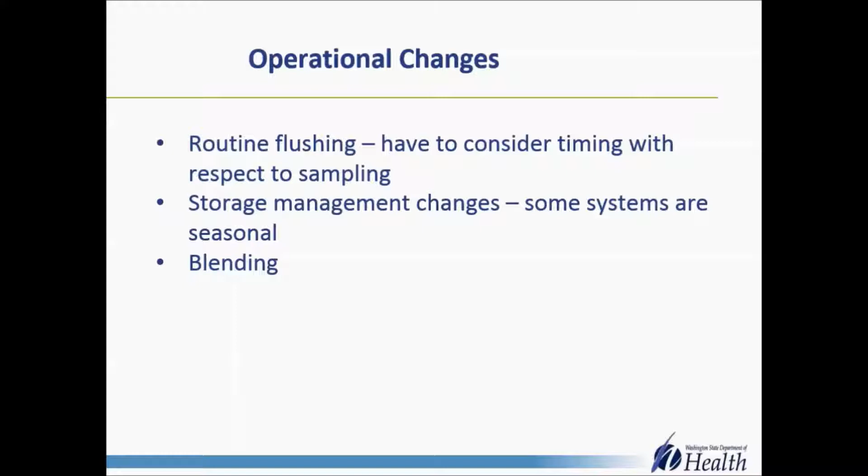We do have systems that are using some storage tank management. We have seasonal systems with vacation homes where water usage is lowest in the winter, and DBPs would actually spike in the cold winter because water usage was so low. They have gone to a winter operational mode where they lower the tank levels in the winter to help address that problem. We also have some systems that are blending, but they need to pay attention to when they blend surface water and groundwater sources to make sure they're staying below the DBP levels. One system that has both surface water and groundwater measures the TOC in the blended water to make sure they're staying below the levels.

So I wanted to talk a little bit about the groundwater systems here. As I said before, the majority of the systems in our state that have DBP MCL exceedances have been groundwater systems. And as you can see, the water quality is not real great from groundwater - hard to extremely hard water, high iron and manganese, conductivity, TDS, and generally low TOC. I think this low TOC is very interesting and worth more investigation.

Another thing we have in one county is a lot of relic groundwater - basically really old, ancient groundwater that is very hard with lots of minerals. The county hydrogeologist for that county was developing their seawater intrusion regulations several years ago, and he discovered that many areas with high historical chlorides and conductivity were not always due to seawater intrusion, but to this relic groundwater.

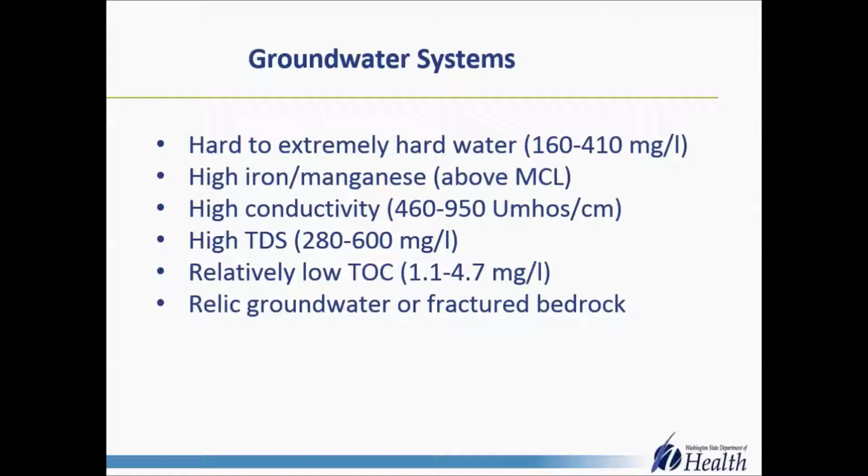In another county where we've had a lot of problems, the wells are drilled in fractured bedrock. TOC is relatively low to moderate, about 1.1 to 4.7 milligrams per liter. This is the county where we've had some successful installations of active aeration, and some other systems in the area are also looking at that option.

I did want to share a couple of interesting tidbits. We have one system that purchases all of their water from Metro Vancouver in Canada. Metro Vancouver completed construction of their new Seymour Capilano filter plant in 2010, and once that change happened, the consecutive system's THMs dropped quite significantly, from 134 micrograms per liter to 23 and 41 micrograms per liter. So the system themselves didn't make any changes, but with the addition of filtration on the supplying system, it pretty much solved their problem for them.

We have another surface water system that installed a brand new treatment plant. They changed coagulant. In their old plant, they had an HAA5 problem and a copper problem. They installed a new plant, changed the coagulant, and their problem changed to THM exceedances and lead above the action level. They also got a new operator in that time, and their inactivation ratios for the treatment plant were running at about 9 to 15 with the old operator. With the new operator, they've reduced those down to about 2 to 5. They increased pH for corrosion control and changed back to their old coagulant, and they have been successful with those changes.